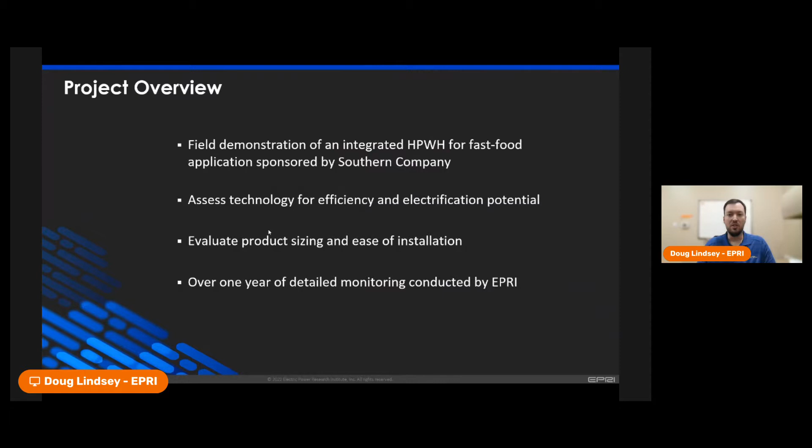So today I want to talk about this project that we did in partnership with Southern Company, and thanks to Southern Company for sponsoring this work, where we demonstrated a new integrated heat pump water heater for fast food application. I'll talk about the product a little bit more in detail here in a second. But our main goals were to assess this technology for its efficiency and/or electrification potential, looking at product sizing, ease of installation, customer acceptance, and just energy performance in general over the course of one year, where we did some detailed monitoring on it.

So here is the product that was selected, an A.O. Smith CHP 120. It is actually the only light commercial integrated heat pump water heater that I'm aware of. This was released in 2019, and our project demonstration actually began in 2020.

But here's just a little bit about how it works, what the product looks like. You can see the heat pump and the evaporator fans are on the front of the storage tank, which is in the back. So it's a completely integrated system. You see the wraparound condenser on the tank. There are two electric resistance elements that serve as additional heating elements, one on top, one on bottom. It is an R134A refrigerant product currently. You can see it's rated COP of 4.2.

It consumes about 3 kW on the heat pump side, and I'll show some more details into what we saw in the field. This product is rated for 208 or 240, and we actually ran this at 208 in the field. It's a little bit larger than some electric resistance or natural gas tank solutions because it has the additional heat pump, and a little bit taller as well. I'll comment on that in some of the pictures we have.

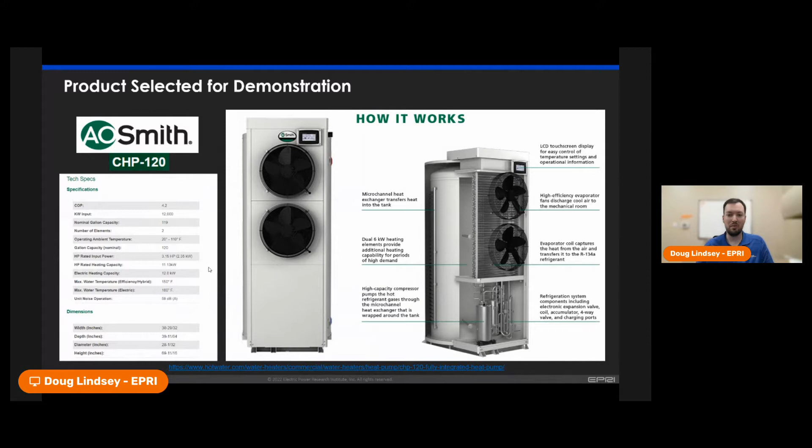Here's an example of some of the applications we looked at in our site selection process. We actually were looking first at Sonic's restaurants and then transitioned to McDonald's. All of these were in southern Mississippi, and we had a great rep from Mississippi Power go look at field sites for us during COVID. That was another challenge for this project—it almost completely happened during COVID, so it was a bit of a challenge to complete.

Here's some examples of sites that we did not select. These are other McDonald's in the southern Mississippi region. A lot of these probably would have worked, but we picked one that would be easiest to install. You'll notice in most of these there's a washing machine almost directly next to the heat pump water heater—in this top left picture, that did limit us in terms of space constraints. You'll also notice all of these are electric resistance water heaters. All the McDonald's in this region are actually all-electric restaurants, and that's been the case for a long time, so we didn't have the electrical capacity constraints that several other areas of the country deal with when installing a heat pump water heater.

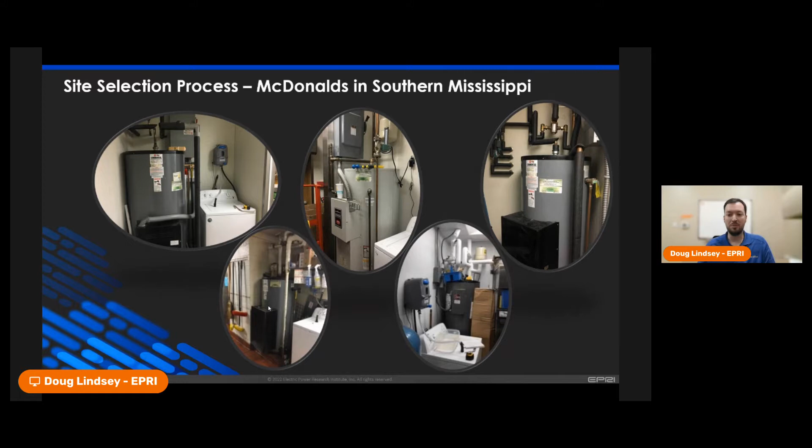So the site we ended up with is this one on the right. This is actually one of the older water heaters of all the ones we looked at—an 80-gallon electric resistance water heater, 3-phase, with six 3 kW elements. You'll notice here it's right next to the back freezer, toward the back of the restaurant but still in the kitchen space. That's a known benefit of heat pump water heaters in a hot application like a restaurant kitchen—they can use the beneficial cooling, and that was one of our primary objectives, to get this into an application where it would make the most sense.

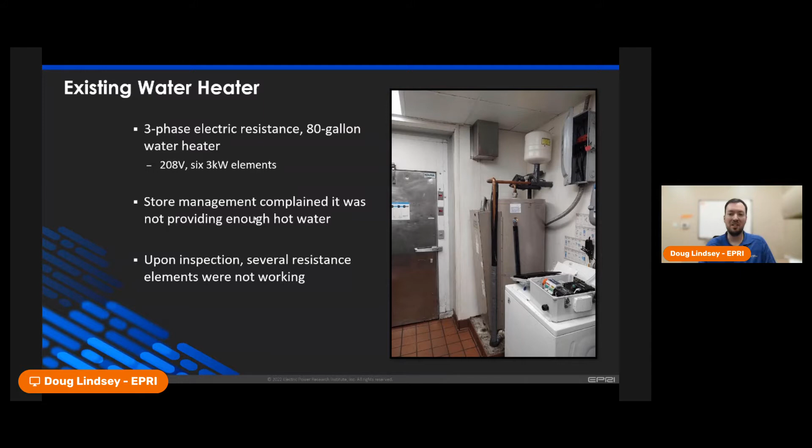You can see this is a picture during installation of our monitoring system. We did one week of baseline monitoring before installing the heat pump water heater, and I'll show that slide next. We got a comment, interestingly, from one of the store managers that it wasn't providing enough hot water all the time—they would often have to delay a dishwashing cycle by 30 minutes or an hour just to let the tank recharge. That wasn't something the facility manager knew when he arrived; it was a new learning once we got into this site. We were happy to come in and hopefully provide a better water heating solution. As I mentioned, several resistance elements weren't working, and that wasn't known until we got into this project.

Looking briefly at the week of baseline testing, my chart at the top shows the water flow in 1-minute data intervals—we measured water flow at the inlet to the water heater, electrical power consumption based on voltage and current, inlet and outlet water temperatures, and ambient air temperature. Once we got the heat pump installed, we also measured intake and supply air temperatures. So pretty detailed monitoring, all at 1-minute intervals.

As you can see in this picture, there are a lot of water draws throughout the day—almost constantly some amount of water is being pulled through the water heater. My red dots at the bottom show instances where the outlet temperature dropped significantly below the set point of 140, but it generally recovered pretty quickly and was able to recharge.

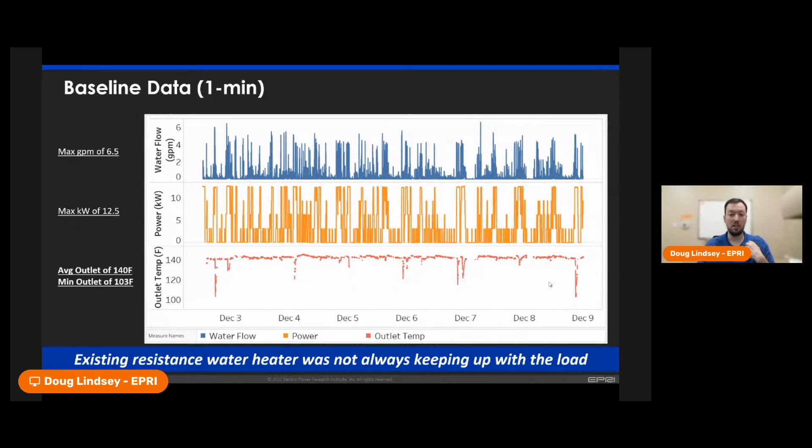But that was just in 1 week's time that we saw several instances of a little bit of underperformance.

So here is the installation that we put in as part of the project. The project paid for the product and installation. You'll notice the heat pump water heater here on this left picture. We actually did have to knock out the concrete base to get the product to fit into this space because there were some pipes going through the back of the wall that we needed to not have to move. We probably could have moved them if we had to, but wanted to keep the installation as cost effective as possible.

And you can see some of our monitoring equipment. We've got the air temperatures here, we've got our water flow meter here. There is a condensate drain that was already existing, which was another benefit to this location as well.

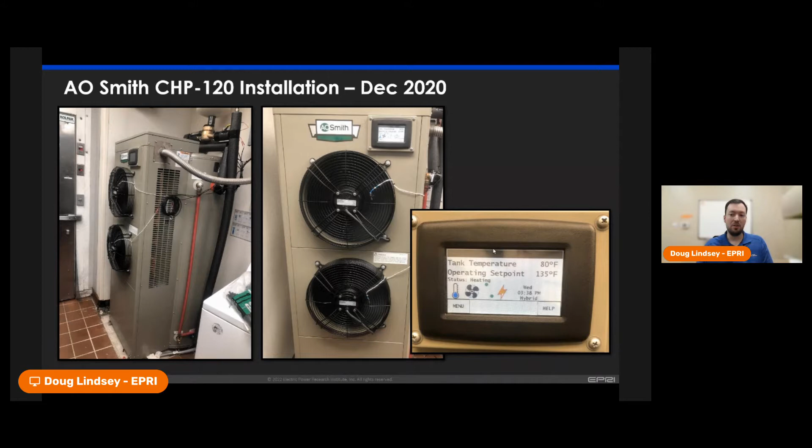Here you can see that the unit has a touch screen. It does have on the front display tank temperature, set point temperature, status, time, and there's a menu where you can go through more options. I'll comment a little bit about this tank temperature setting a little later.

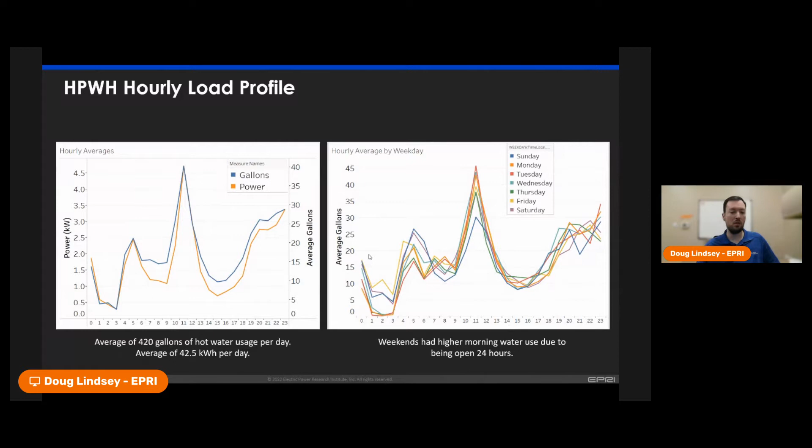So I mentioned 420 gallons being the average water consumption, but the scatter plot actually shows daily COP that we calculated versus daily water drawn through the tank. It's a wide range, you can see from 250 up to 700, various days, various water draw schedules. I didn't mention this earlier, I guess a lot of the loads in this restaurant are the dishwasher, the hand sprayer to clean off dishes before they're put in the washer. There are some hand sinks connected to the bathroom as well, and a mop sink. So those are the primary hot water users in this restaurant.

But looking at the COP trends, you can see that it ranged from 1.5 all the way up to 2.8. That 2.8 number is a little bit of an outlier, and I looked specifically at this day. This was actually the day where we didn't have any electric resistance usage, whereas the rest of these days did have electric resistance operation mixed in with the heat pump operation. So a real hybrid solution is being shown here. We calculated an average daily COP of 1.9.

As you can see, it varies significantly day to day. Some of my theories for why this would be: maybe you have different people working each day, or maybe people accidentally leave a faucet on for a longer period. But generally, the COP is very dependent upon when the water is being drawn and how long it's being drawn.

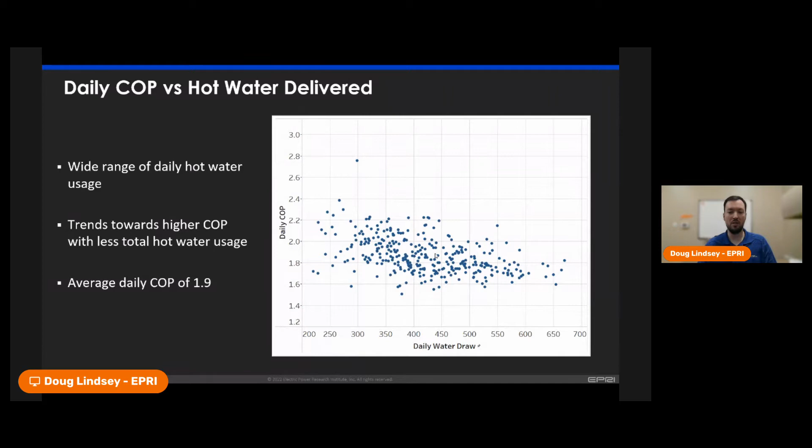If you have a lot of short draws that are spread out, you're more likely to see the heat pump be able to recover based on the settings the manufacturer has in place. But when there's a long or drawn-out water draw, the electric resistance elements do kick on.

I can show that in more detail in this example day, where there's 476 gallons drawn. I picked a day that was right at our average of 1.9, so you get a good feel of what an average day looked like. I think it was a weekend where water was drawn all throughout the day, even in the early morning, but there are several instances of the electric resistance elements kicking on.

We have examples here of 2.7 to 3.5 kW for the heat pump operation alone, and you can see it kicks on several times throughout the day. But there are several instances as well of the electric resistance backup elements kicking on.

You might remember I said there are two 6 kW elements, but since we're operating at 208, we actually saw a little bit less power consumption from the elements. So that's why our max kW was around 12 kW.

You can see even when these backup elements are on, the heat pump is still on—it's kind of hard to see here, but it's operating at the same time as these elements. You can also see two tiers, so the bottom element and the top element are on at the same time here. But that's not always the case; sometimes only one element is on.

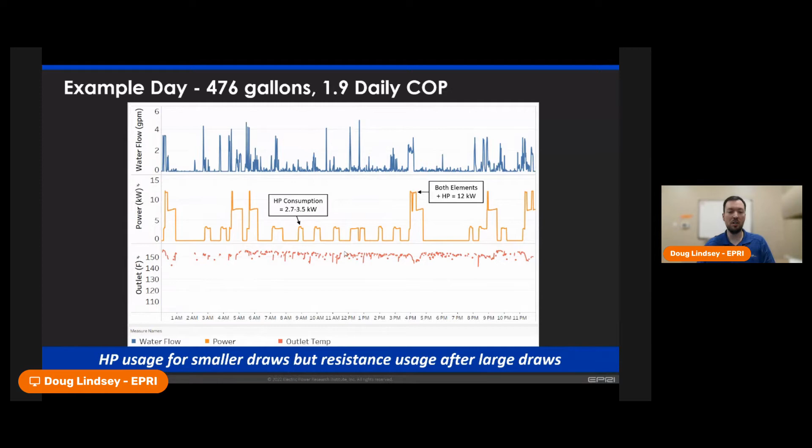I'm showing the outlet temperature here on the bottom as well, just to show that we did deliver hot water throughout the project. We actually had the users increase their set point from 140 to 145, and I'll talk about why they did that in a second. But overall, we saw good performance throughout the project.

Here's a look at the air and water temperatures we measured. I'm going to focus first on the bottom graph, the inlet water temperature to the tank. These are daily averages, but you can see a large change in the inlet water temperature throughout the year. This is in southern Mississippi—it got down into the 50s for a little while, not very many days, but it did get up pretty hot, above 80 for the summer, all the way up to almost 85, 86 degrees on the inlet water side.

Measuring the air temperature, we measured this at several different points. The blue line is the upper room ambient air temperature, measured at our data acquisition box, a little bit separated from the water heater itself. In purple, we're also measuring the intake air temperature and the exhaust from the front of the unit. You can see it was significantly lower at the exhaust throughout the day compared to the top of the room, so it's really a localized temperature change when we saw the heat pump in operation.

It was also a little surprising to me to see the restaurant be as cool as it was at the upper room ambient temperature throughout the entire year. I expected it to get a little hotter in there. But we found out from the facility manager that a few years ago they installed additional air conditioning specifically for the kitchen because it was very hot there. So maybe if we had gotten to this site a little earlier, we could have helped offset some of those AC upgrades.

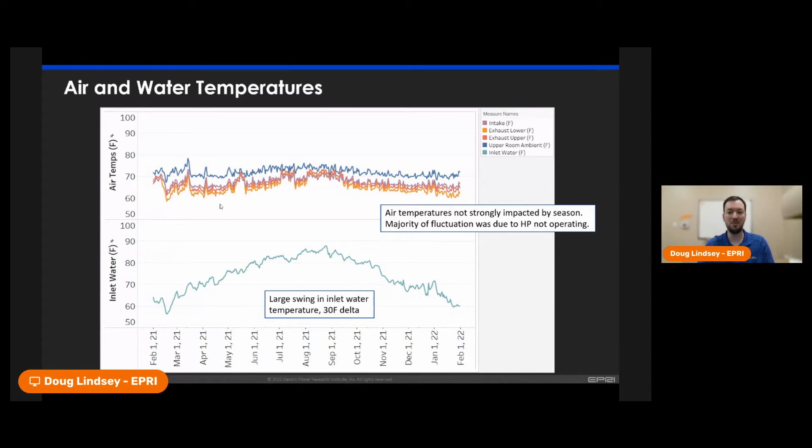We did have a few hiccups along the way, as all field projects go. Some things don't go the way you expect. We had compressor fuse problems throughout the project, specifically early on, where the heat pump would stop operating but the electric resistance continued to operate, so the restaurant never really noticed. I noticed it based on my data acquisition. We had the heat pump go out several times because of a fuse blowing. We worked with A.O. Smith to find the solution, got that changed out, and resolved the problem. Hopefully that continues to be a good solution for us and for their future products as well.

We did notice that the fans in the evaporator coil got very dirty. Restaurants are a very dirty environment, there's a lot of grease in the air. We did not have an air filter on the heat pump water heater when we started, but we have since added one. A.O. Smith informed us they had a retrofit air filter kit, and I understand that's going to become standard on their next generation of this product line. We've added the air filter kit to help keep the evaporator coil and fans from getting as dirty, but they might still require occasional cleaning.

As I alluded to earlier about the average tank temperature display on the front, we found that the customer perceived this as the outlet temperature, which it is not. When I was there on a site visit, I watched that number change from 140 to 120 very quickly during a dishwashing cycle. I knew that was the average tank temperature, but based on comments from the facility manager and store operators, they perceived they were getting 120-degree water at their dishwasher. That's kind of why they bumped up the tank temperature at the beginning of the project. But my data shows they have not been getting anywhere near 120-degree water during that time.

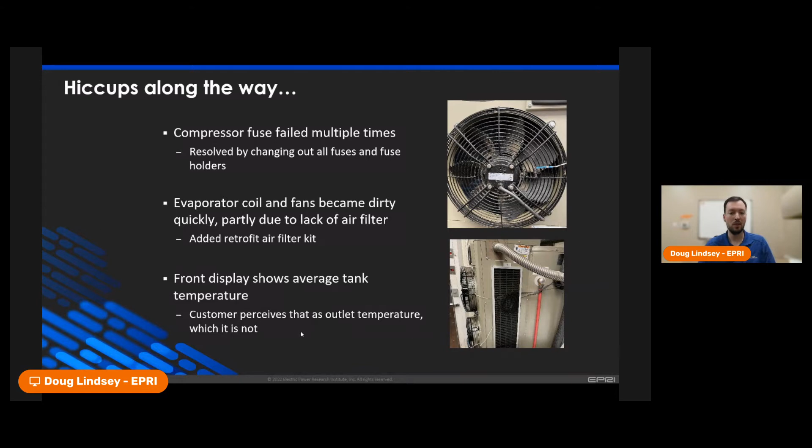So in conclusion, I want to wrap up and say we had a really good demonstration overall. We estimated yearly water heating savings close to 12,000 kWh. I don't have it shown here, I have it in our report for Southern Company, but we're estimating probably a 3 to 5 year payback in this application, because we're seeing double the efficiency of what the standard electric resistance product would use. With the average COP of 1.9 and water draws of around 420 gallons per day, this is a really good product for this application to get more efficient water heating into these spaces.

And it's a plug-and-play solution. It's integrated, there's not really any design necessary. You just got to make sure you've got the electrical capacity and the space to put the water heater in. It was a really easy solution to get into this restaurant, actually.

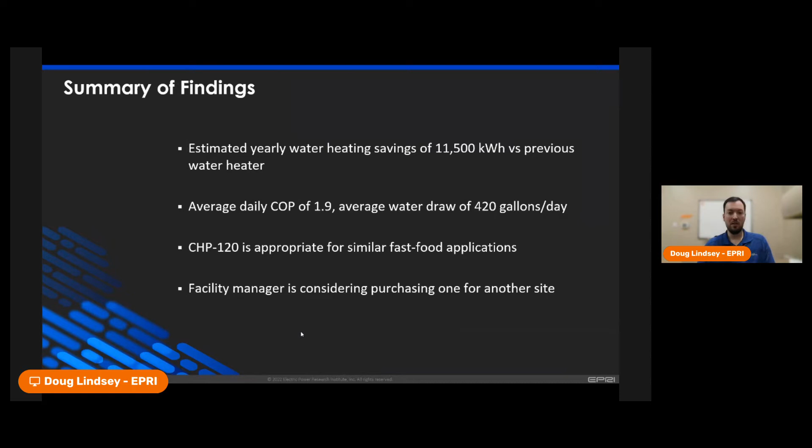The positive thing here, my last bullet, is that the facility manager is actually considering purchasing one on their own dollar to put in one of their other sites where they had a water heater about to fail. To me, that's a positive, to see that the store had a good experience, that they want to use an efficient product and understood the benefits of it, and we're excited about the technology. So that is all I have. I'll wrap up there and hand it back to Amin. Thank you.

Thank you, Doug, that was really interesting. Commenting on your results of daily hot water use and the variations from day to day, those are very consistent with past field studies in quick service restaurants. So yeah, definitely behavioral, and also just some days you have a heavy day of usage, a lot of foot traffic, and other times you don't. So that was great stuff.

Thank you. So our next speaker is Al Takle. He's a product manager for Steffes, a manufacturing company based in Dickinson, North Dakota. He has over 30 years of experience focused on electric thermal storage and demand response technologies to meet sustainable electricity distribution and decarbonization goals.

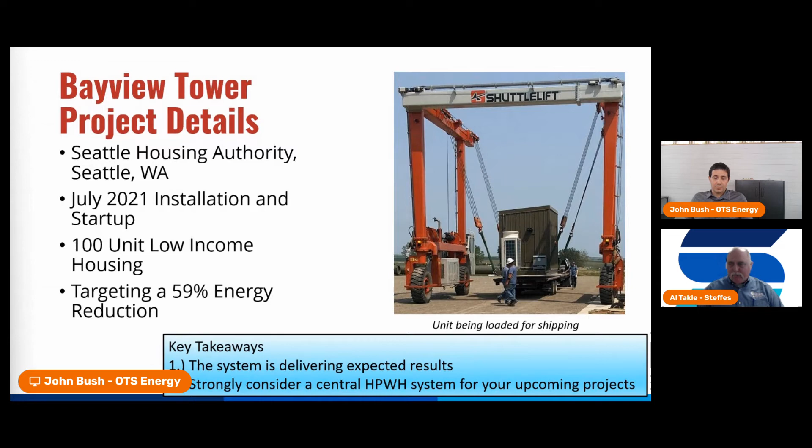So it does take a team to get the system put together, and this is a project that was no different. Ecotope was the system designer and project manager for the M&V. Mitsubishi Electric, METUS, Mitsubishi Electric Trane, donated the heat pump, the controls, some engineering resources, and the on-site install and startup labor. And of course, at Steffes, we built the package, and then we were also on site for the installation. Here you can see a picture of us at the startup, and we're on top of a mechanical room. This is outside, so the system was set there with a crane.

Some of the pieces, parts that were in the overall system. On the right-hand side, we show the Mitsubishi QAHV air-to-water heat pump. We have 3 tanks that are piped in parallel, and each tank we show 5 sensors there. So we're monitoring stratification. That's important, especially as you're doing load management kinds of things, to make sure that you're always delivering hot water off the tops of the tanks.

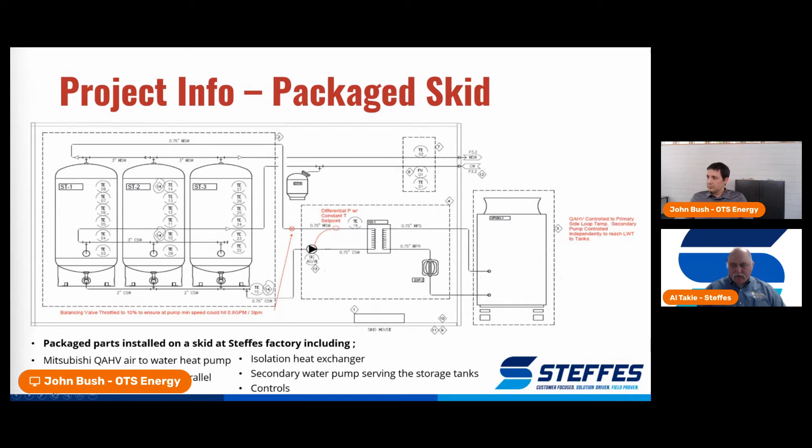So this system is a retrofit system, and we had an existing mechanical room that had water heaters in it, and those were retained. We use those as the temperature maintenance system, known as the swing tanks, as the water is getting recirculated through the building. And then there were new electronic mixing valves that were also put into the system as well.

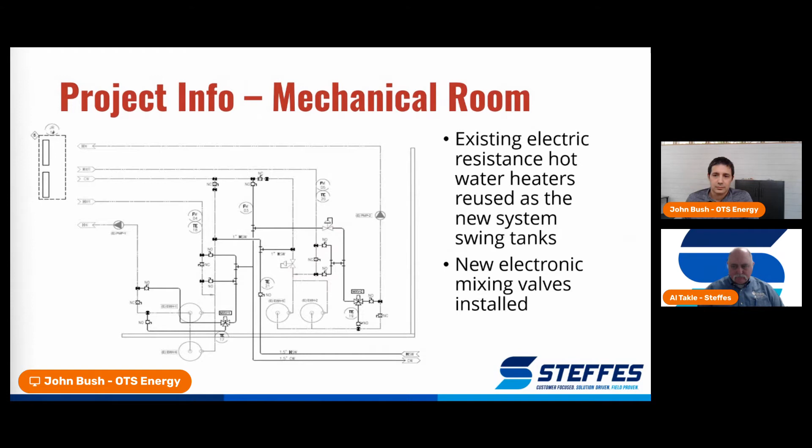John, on to you. Thanks, Al. Hopefully everybody can hear me okay. We've had a little thunderstorm coming through overhead here. I think it's passed, but hopefully there won't be any background noise or a flash and a boom, and hopefully you won't get to see me jump out of my chair here.

So I'm going to talk about the data collection, the data we've analyzed so far. I'm going to summarize what's on this slide, which is just an overview of the data collection, and then the details here, anyone who's looking through this stuff later on can look if you have any questions. So the building switched over from the existing electric resistance heaters to the heat pump in August. Data collection got up and running in October. And then we had a pump failure. We had to replace one of the pumps in the building in mid-December. So that was convenient for getting us some surprise, unexpected baseline data.

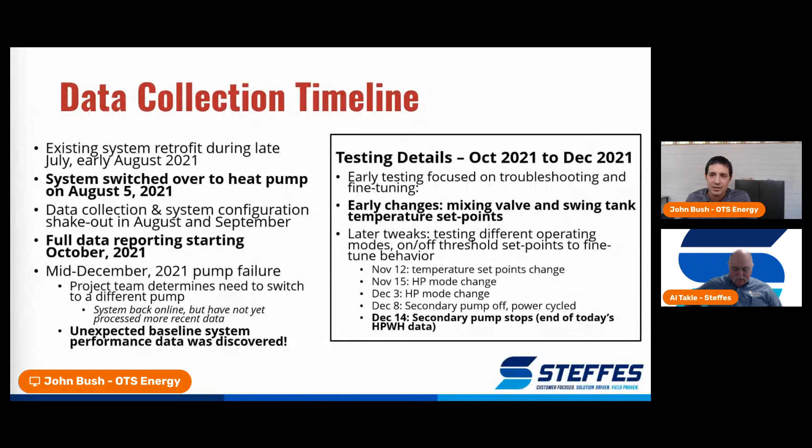For today's presentation, I've got October to December data. The system is back up and running, but we haven't analyzed the data since that reboot for presentation purposes. In the spirit of full disclosure, there are mode changes that happened during this period, but none have a huge impact on the big picture results, so I'm going to gloss past them. Hopefully this will be part 1 of 2 presentations, and we can share more at next year's hot water forum.

This slide shows the operating conditions the heat pump is exposed to. On the left, you can see the average, minimum, and maximum daily temperatures at the site. This is Seattle in the fall, so it's pretty mild weather.

The orange is the city water temperature entering the building. You can use this data to go look at the manufacturer's performance data and calculate our expected COPs at any given condition. Those expected COPs are the heat pump instantaneous COP, delivered capacity divided by power, instantaneously—it doesn't include storage or anything like that. Based on the weather conditions, a rough range of about 2.4 to 3.0 is what we'd expect. This is a CO2 heat pump, delivering about 150 degree water into the primary tanks.

On the right, we've got water draw information. The bottom right shows daily totals for water draw during the period we're looking at. We had an average of 2872 gallons per day, and most days are within about 10% of that, so there wasn't a huge variation at this site, with a few outliers of course. The upper right is the average water draw profile during the monitoring period—a pretty typical draw profile for a multifamily type building.

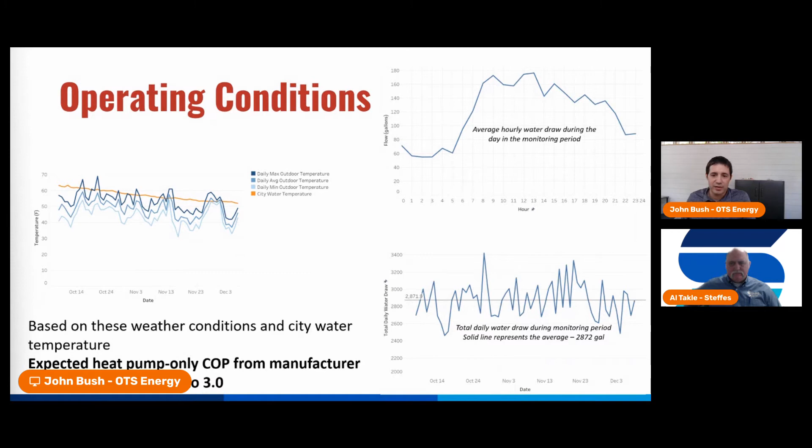This slide shows a typical week of hot water usage. On the right, Al mentioned the 5 internal temperature sensors on each tank. You can see the ports here for them, along the walls of the tanks, in between the caps, so it captures most but not all of the volume in the tanks. Each of those corresponds to a purple line on my graph.

So I'm showing the stratification. I'm only showing one of the 3 tanks, but they're in parallel and stratify roughly the same—it'd be a heck of a graph to look at with 15 lines instead of just 5. The red line represents the water leaving the 3 tanks in parallel and coming together to a single pipe leaving the system, that's that temperature there.

So that's the merged temperature leaving the 3 parallel tanks. Green and yellow here are the mixing valve leaving and returning temperatures. There are 2 mixing valves, and we averaged them to make the graph easier to visualize.

From this temperature data, this is a typical week in October, pretty representative. You can see the discharging and charging as these temperatures in the tank, the thermocline moves down and up—you can see the bottom getting colder and warmer again. The nice thing is the top of the tank, the leaving temperature out of the tanks in parallel, is always comfortably above that mixing valve temperature. It goes to the swing tanks and up to the mixing valve, so we're always delivering hot water on the order of about 20 to 30 degrees higher than what's needed at the mixing valves, out of the primary tanks through the swing tanks and out to the building.

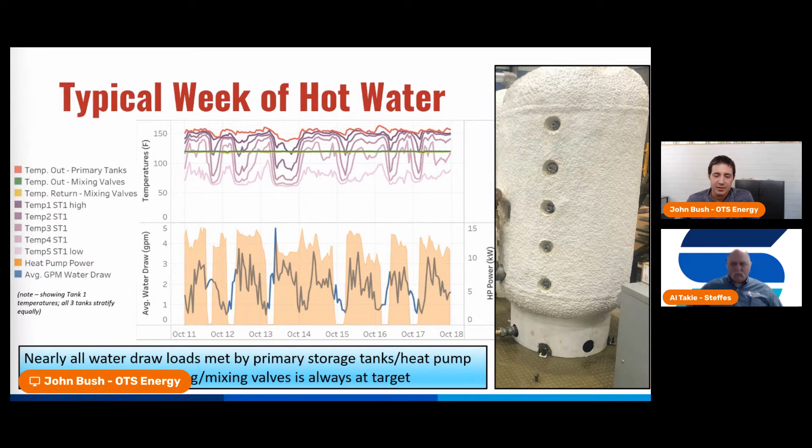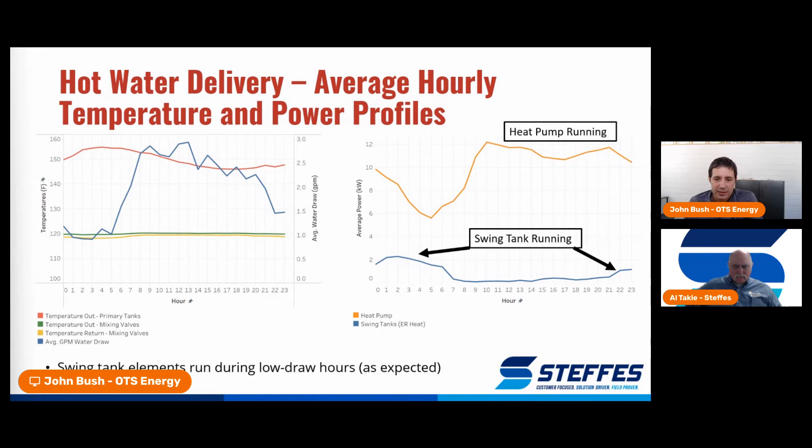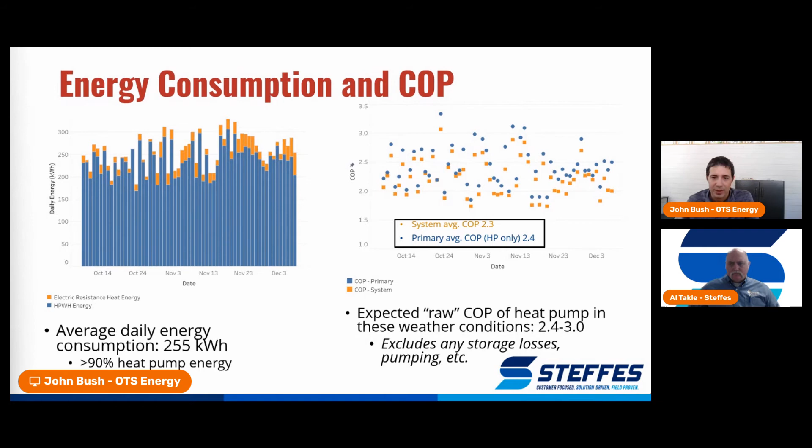Okay, last of my slides here before I switch back to Al. So I mentioned at the beginning we had one of the pumps on the system needed to be replaced, and Al mentioned that the swing tanks of the current system are the existing electric water heaters that were the only water heating system for the building previously. So when we had to switch out that pump, with some minor control changes, the system went back to those baseline electric resistance tanks. And conveniently, surprisingly for us, we got some baseline data, which we weren't expecting.

So this graph is courtesy of our friends at Ecotope. This is the daily energy consumption of the heat pump alone, and then the total, adding up all the components. As I mentioned, this was 255 kWh a day was the average here. And then this is when the pump is replaced, so here's the total energy consumption in the post period. The average on that was 566 kWh per day. So this translates to a little over 300 kWh per day savings.

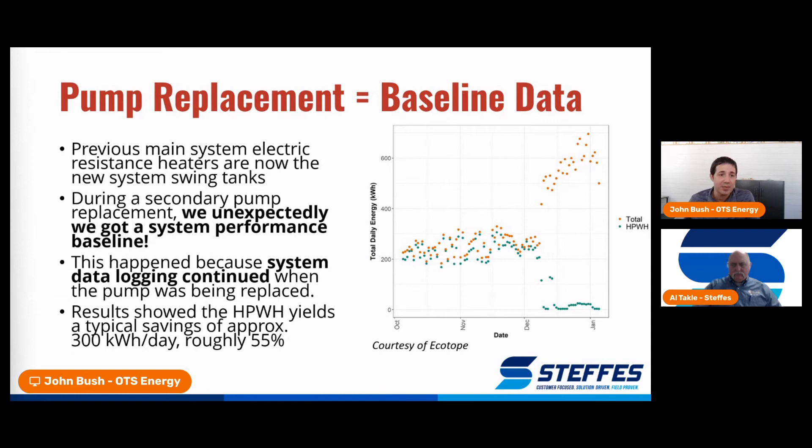It's a 100-unit building, so you can do the math on the kWh per day with and without, and per unit that is. And the math on that works out to 55% energy savings with the heat pump operating compared to the baseline, which is encouraging.

And with that, Al, I believe you're taking these last two. So just to kind of reiterate what John was saying, the system was operating with an overall COP of 2.3 during the fall in Seattle. We saw 55% energy savings over the electric resistance heat. We were targeting 59%. So while we think that is pretty close, we are anxious to see how we're going to end up over a full year, not just in the fall.

Hot water delivered at target temperatures throughout the monitoring period. Of course, anytime you're doing water heating, it's super important that you have hot water to the people that want hot water. You don't want to take that call, trust me. And the project is ongoing, and like John said, we expect to present more data next year with having all the seasons through that.

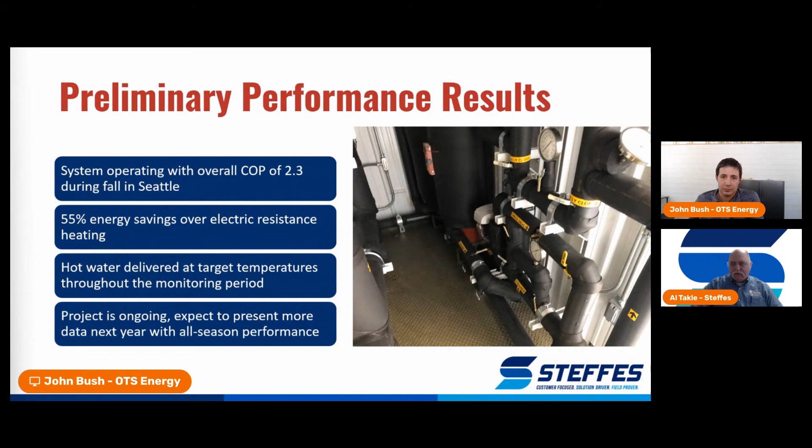And the lessons learned: factory testing and pre-commissioning can reduce plumber risk by proving system operation prior to arrival at the job site. In addition to the heat pump, ancillary items like secondary pump, mixing valve, system controls, and remote reporting are critical to the success of a central heat pump water heater implementation.

And things that we're going to consider in the future, and I saw this was one of the questions, is why do you use parallel instead of series? It is something that we are looking at. Our current systems that we're working on actually use series instead of parallel. But the idea of looking at both of those is to get the stratification to be the best and be able to maximize our storage, especially when we start doing load control, which, by the way, is starting this week at Bayview.

Looking at different backup heat supply options. Some of the people we've been talking to are very concerned about it as we look at colder climates, and we've actually had people mention doing dual fuel kinds of systems. So it's something that we continue to evaluate. We're looking at how can we have a package system but still have flexibility to support as many system locations as possible.

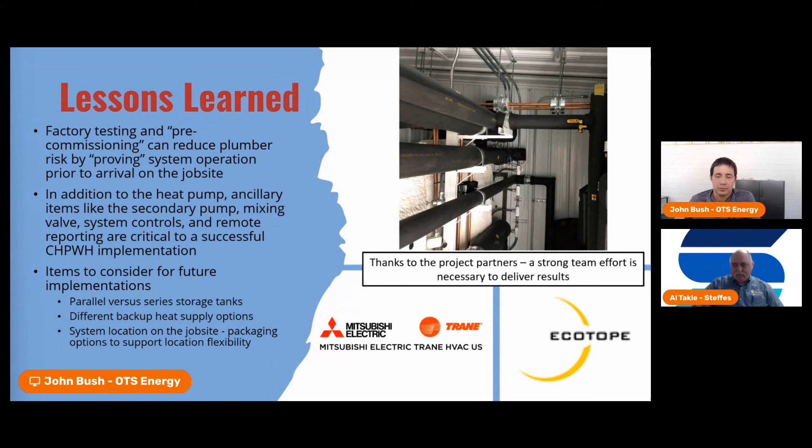Again, thanks to our project partners, Mitsubishi Electric Trane and Ecotope, and for all the help that went into this. We should mention BPA was also very much involved with all of this project as well. The picture on the right here shows the inside of the housing. The Advanced Water Heating Initiative has lots of on-site displays, and you can actually go in and do a virtual reality kind of tour of this. That's very exciting as well.